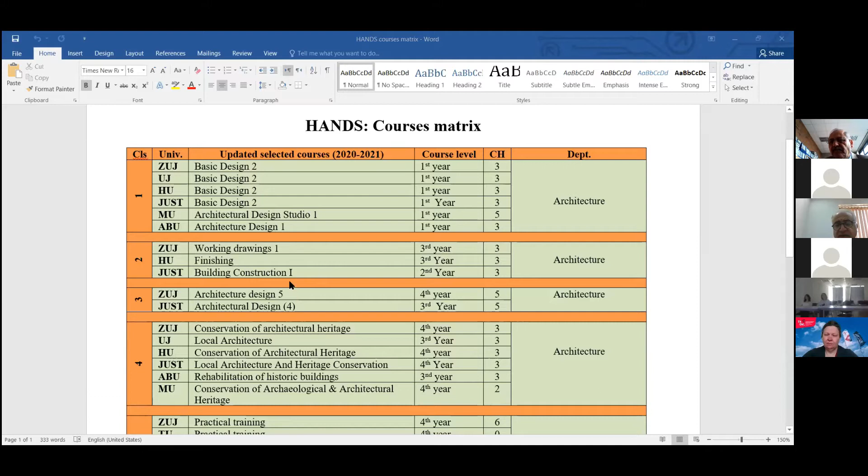We have courses in the 3rd and 4th year, which are also design courses. We have courses to do with the conservation of architectural heritage, because part of the objective of the project is to conserve these traditional processes that exist within these craftsmen and transfer them into the academia as a design and production process.

That's why the relationship between us and the craft society works both ways: we will teach them and try to develop the traditional designs and contemporary designs that have a market within Jordan, Syria, and the region. And they will give our students the knowledge of competencies needed in terms of craft design, object design, and industrial design that is needed by the labor market. So it's a mutual relationship between us and them.

By that, we chose lots of courses involved in conservation of architectural heritage, preserving the architectural heritage, and rehabilitation of these items as part of the project.

Also, all our students have to do practical training. We took the course of practical training at least 2 or 3 weeks, which sometimes extends to 3 months. This practical training will be developed within the 2 centers that are going to be established as part of the project.

One center will be in Zaytun University for the Jordanian universities, and the other one, Tishrin University, for the Syrian universities. But the training courses and programs and vocational courses will be designed by the craft society. Some of the implementation will be within these centers, and other training will be within the workshops of our stakeholders, the craftsmen.

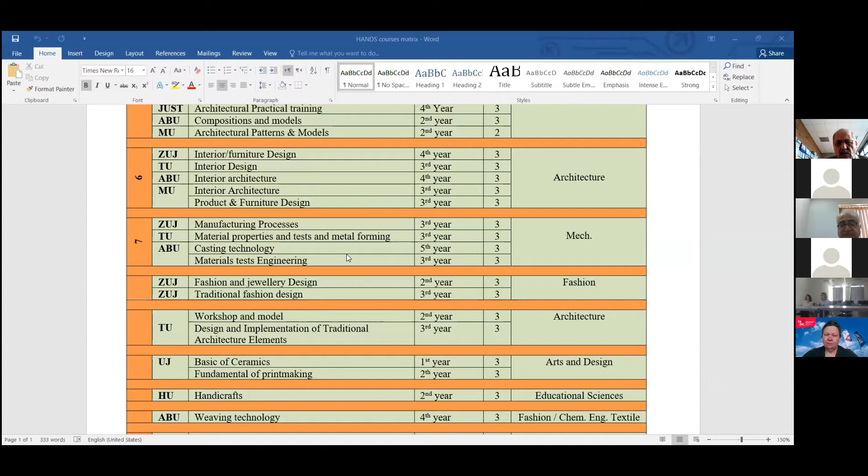We also have courses related to modeling, workshop modeling, and architectural elements, applying arts into ceramics, pottery, and different handicraft aspects like weaving and fashion design departments. Based on this project, Zaytuna University of Jordan established a fashion design department as one of the outcomes of this project. It started last year, has now run for one full year, and will continue for a second year hopefully by next September.

So this is, in brief, the courses involved in the project, a huge spectrum of courses and departments. We think this mixture of different departments and courses will enrich the project and enrich the dissemination of its outcomes in direct partnership with the different stakeholders representing different aspects of the project.

So mainly this is what I wanted to say as an introduction about the HANDS project and the courses involved, and the main goal of the project in terms of preserving the traditional craft process, supported by bringing it and housing it within academia, and also getting students involved in different design opportunities and prospects, understanding the traditional design process and developing it into the contemporary design process, which will help the craft society in marketing their products.

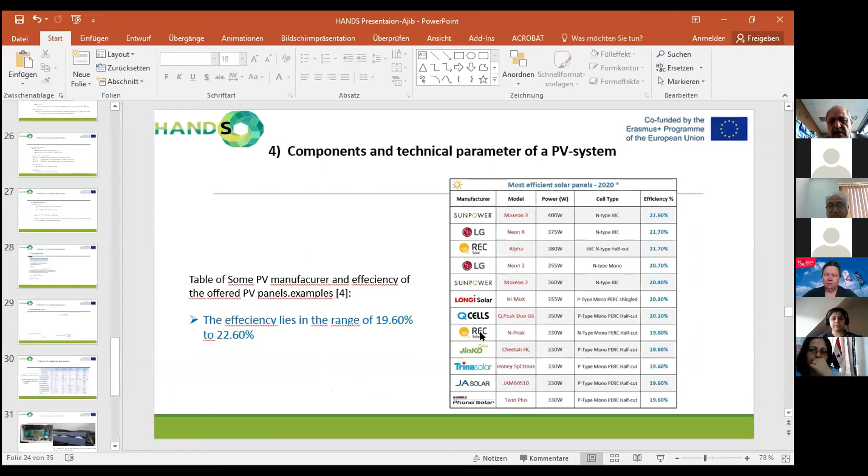Yeah, you can share screen, Doctor. Yes. Here, can you see it? So, can you see it now? Yeah, yes, we can see it now. Yes, thank you very much.

I welcome you again to my lecture. My lecture is about the possibilities of using solar energy in the framework of the project.

How can we use solar energy to make the production of handicrafts more productive, more effective, and more environmentally friendly? I thought about this lecture to show the possibilities of using solar energy, and maybe we can offer this topic as a course at the end, in the framework of the project.

So the outlook of my lecture: I will make a short introduction about the importance of using solar energy as a clean energy source.

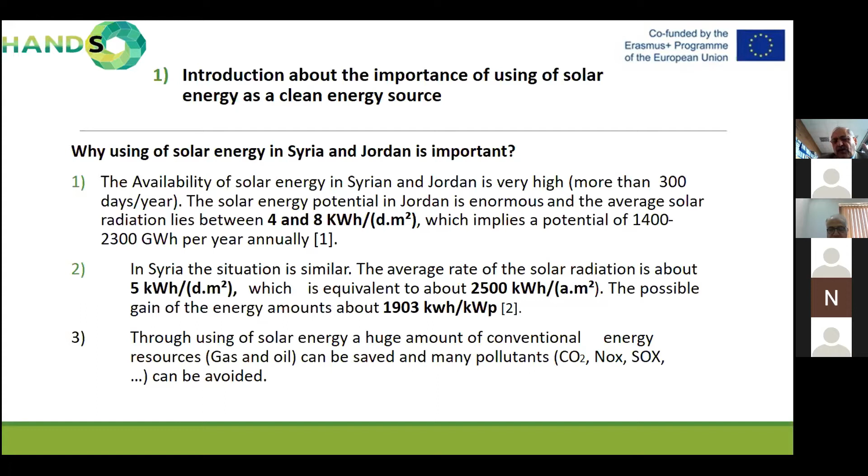And through using solar energy or other renewable energy like wind energy, we can avoid such pollutants, and we can contribute to a healthy life in the country.

That means it is enough only from solar energy to supply Jordan, Syria, and maybe Lebanon with electrical energy. That is 50 gigawatt only from solar energy, photovoltaic, and that is a huge amount. This possibility can be applied in our countries, in Syria, Jordan, Lebanon, and where sunshine is available. And it is available in most regions.

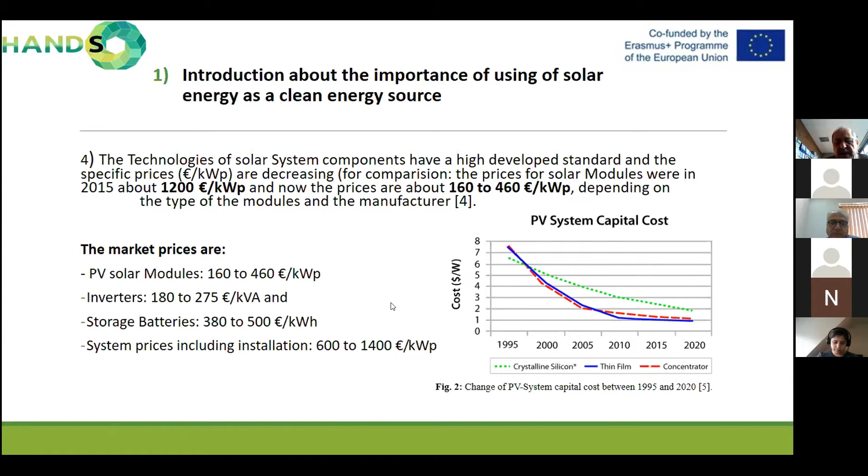So now, which possibilities do we have to use solar energy? As you know, solar energy can be used either as solar thermal energy. That means we have solar collectors, and these solar collectors can provide thermal energy, which can be used either for heating and hot water systems, or for driving solar thermal cooling systems, like absorption or desiccant cooling, which is actually our specialty, the field of solar cooling.

Or we can also use the thermal energy to drive power plants. Solar thermal power plants are very well known. We have solar concentrators, and we can produce very high temperatures, which can also produce electrical energy, and this electrical energy can be brought to the end user of electrical energy.

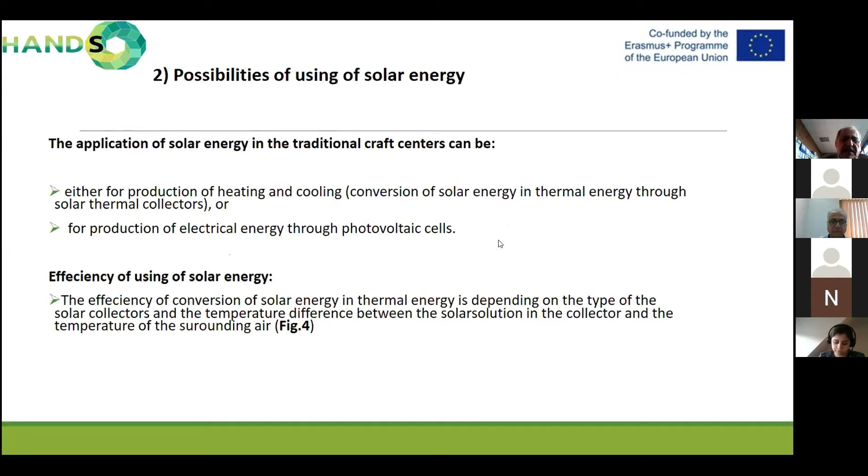A very important factor when using solar energy is the efficiency of the solar collectors.

The efficiency of producing solar thermal energy depends on the technology of the collectors used, whether they are flat plate collectors, vacuum collectors, or concentrating collectors.

Another very important factor is the temperature difference between the surface of the collector—or rather the temperature of the thermal solution in the absorber—and the surrounding air temperature.

The higher this temperature difference is, the lower the efficiency of the collector.

For swimming pools, as an example, we have the highest efficiency because the temperature difference is very low, which means the losses of the collector are very low.

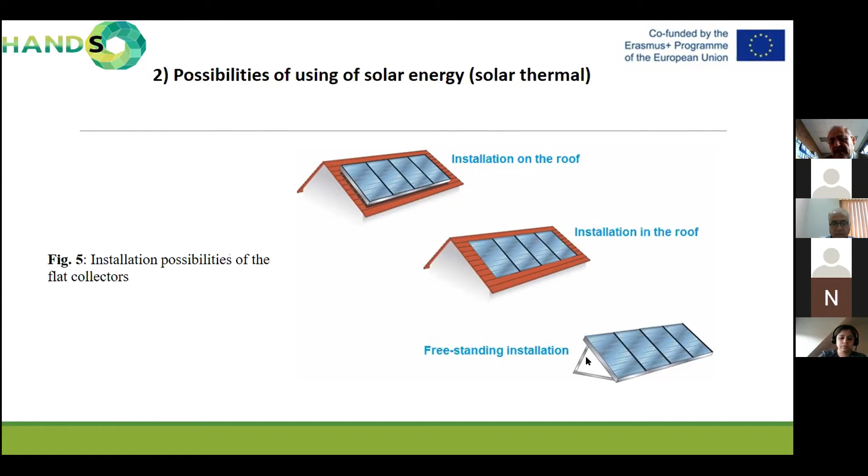In our regions, Syria and Jordan, the most common installation is free-standing, because most ceilings are flat and we have to make this kind of installation.

I wanted to show you the possibilities of using solar thermal collectors.

That is the most possible, simplest installation of a solar collector system.

The fluid inside the collector heats up due to solar irradiation and becomes lighter, so it flows towards the tank. This is a free flow collector, a natural circulation system.

The second system, which is somewhat more expensive, is the forced circulation system. In this case, we need a pump and regulation for the system.

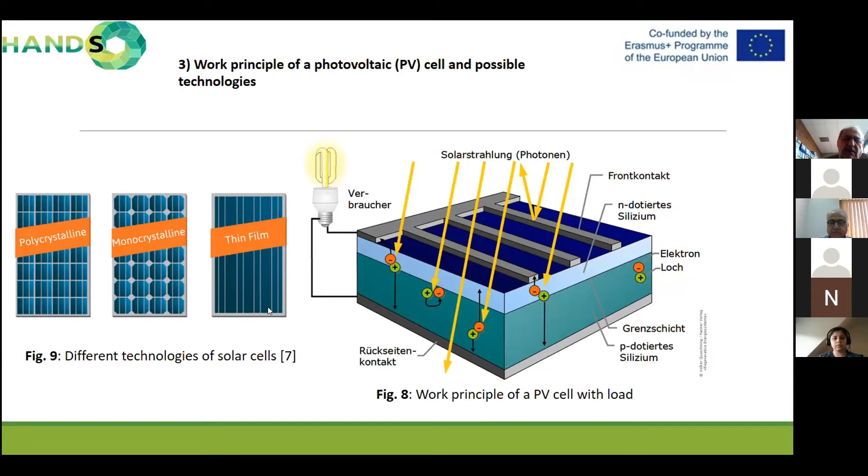So here again, efficiency of PV cells.

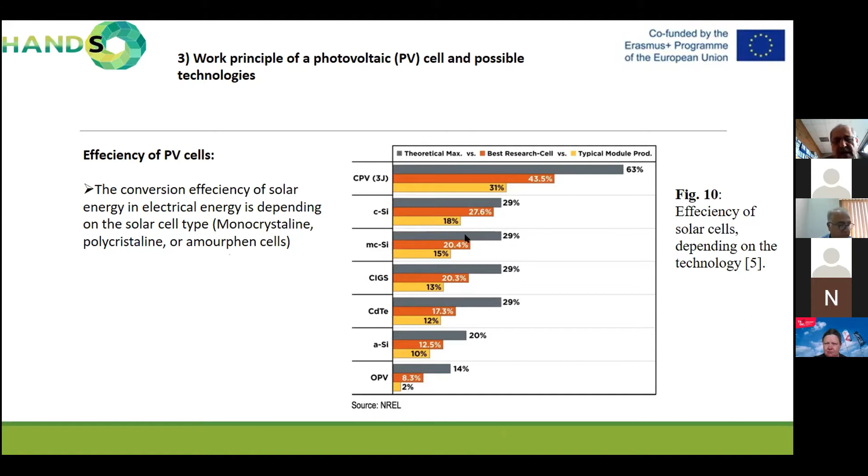That's for organic photovoltaic. Organic photovoltaic is also a field with many research works being done, because the application is very wide. The best practical ones, as I said, are the mono or polycrystalline photovoltaic cells.

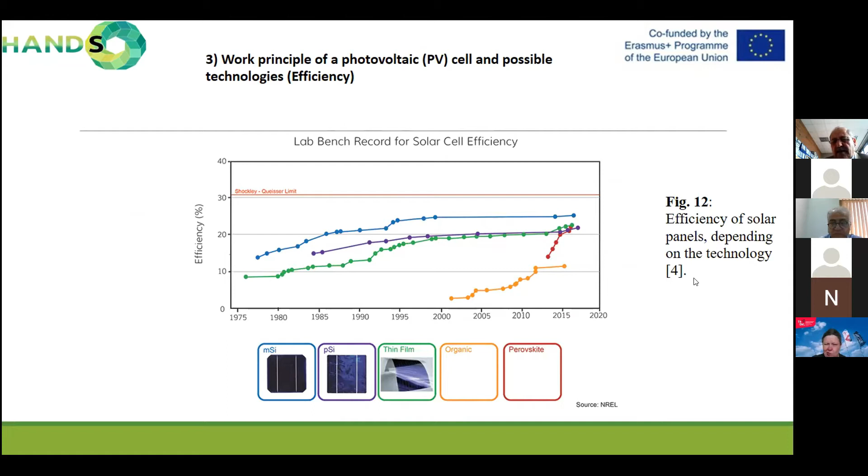Again, that's the panels according to photovoltaic type and technology, and you see in all references they show a maximum of about 24% in the best case, practically speaking.

Yes, there are many ongoing research projects in this field.

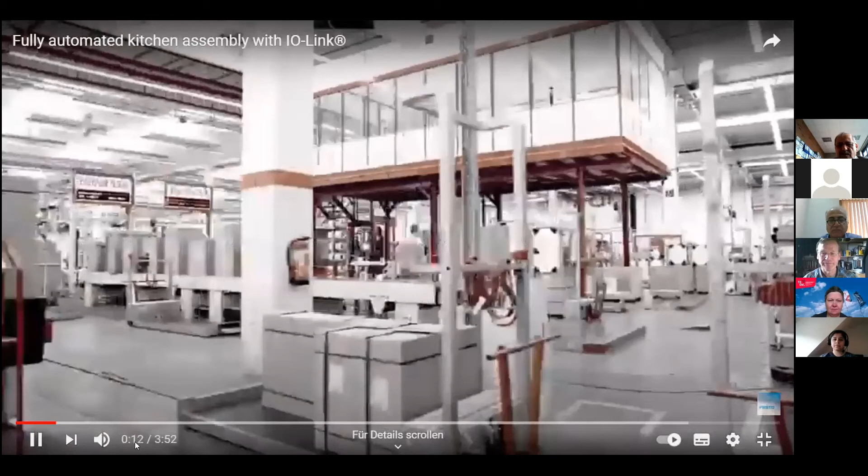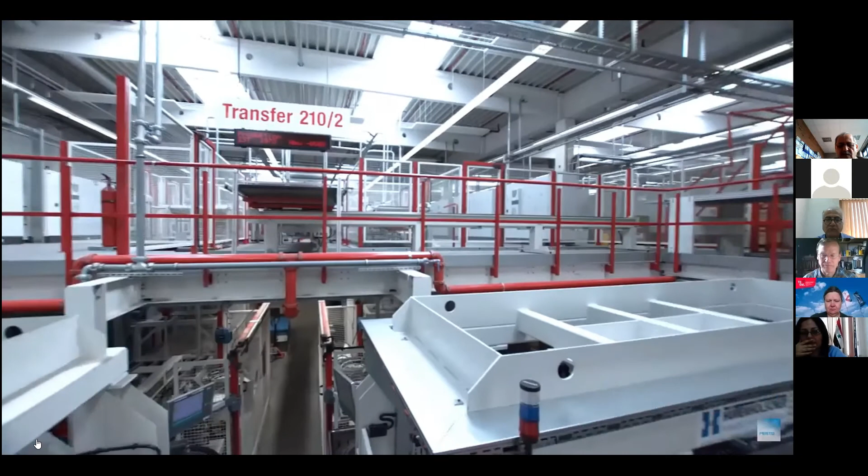A small video just to explain what we are doing, because that is Nobilia, the biggest kitchen producer in the world at the moment, and that is more or less the aim of our course of study. So you will see nothing to do with crafts. At the moment a battle is running between the big kitchen producers, and you will experience some numbers in the small video. Nobilia is Europe's largest kitchen manufacturer and the market leader in Germany. Over 3,000 kitchens leave the company every day. The secret to Nobilia's success is our 3 pillars. The first of these is the product and the quality. The second pillar is delivery date reliability, our score is 99.8%. The third pillar, which is also important for us, is cost leadership. This means we can offer our high quality products on the market at relatively low prices. High quality, delivery date reliability, cost leadership. To achieve this, Nobilia counts on reliable and long-standing automation partners. They guarantee maximum system availability. We place very high demands on our machine suppliers. That's because we expect high process reliability from the systems.

So just to give you an idea, what is the purpose of our course of study? They have to do with chipboard and solid wood and so on, but I hope they also get a good knowledge from us in mechanical engineering, how to use this machine, how to design this machine and so on. So this is in the kitchen industry in Germany state of the art, and that has more to do, I think, with automotive industry than the traditional craft of a cabinet maker. So this is the aim, but the students, due to the case that they are craftsmen, they like to work with hands, and so from time to time we present projects we do together in crafts.

The idea of the Vela Cup is from Italy. It's an international student competition, and a fast dinghy has to be designed, and it's a box rule. And what is important for us is...

75% renewable resources. In our case, it should be made out of wood because our students are more or less wood engineers. There are at the end different competitions, a towing tank, a polar diagram, and at the end then the final regatta with students as well as a professor and a student together as a group.

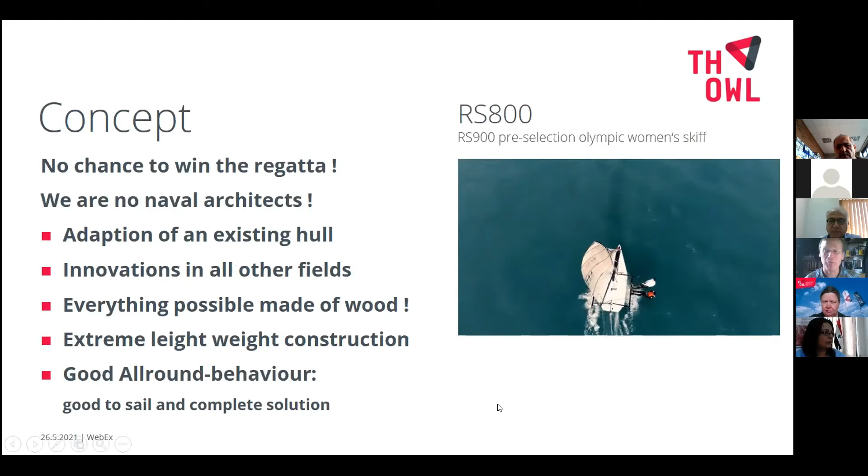So this is a plastic boat, run by 2 athletes. The idea was that we took an existing hull. We are not naval architects, so airflow design, hydrodynamics and so on - that's not a matter of wood engineering.

So the case was that the innovation should be on other fields, and the slogan was 'make everything possible out of wood,' and we succeeded at the end. So that means it was an extreme lightweight construction with good all-round behavior, because our athletes are not the normal ones.

So we were quite inventive, because what we see here is the state of the art of sailing at the moment, the America's Cup. Just some months ago it was finished and won by the New Zealand team. Here you see the Italian team, and they had also a turnable mast.

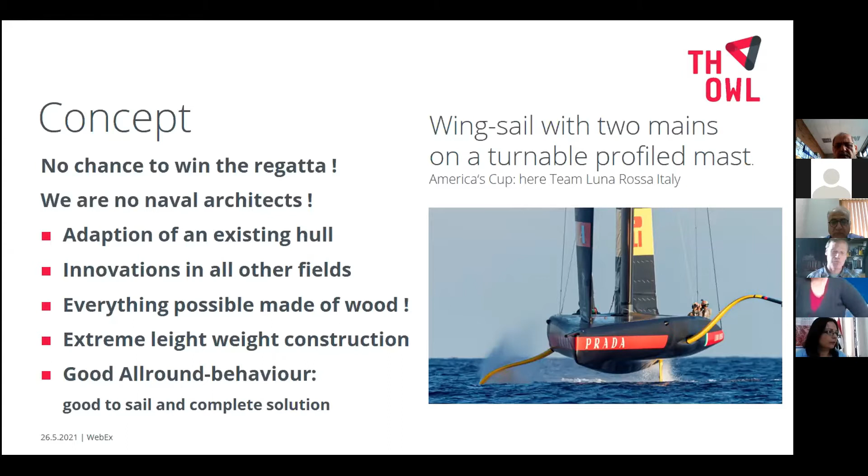Our mast was wood; this is carbon fiber, and they have a double mainsail - if you are a sailor, maybe you can find it out. So the innovative level was quite high in our small project at the end, and also the craftsmanship, as you will see.

Though the design was not made by our own, so we took a boat - I have such a boat as my own - and 2 students were in my garage on a very cold day in winter and took the measurements of the hull.

Then at the end, we had a point cloud in Inventor, made a 3D model, then reduced it again to 2-dimensional drafts in AutoCAD, because that is what we have traditionally at our hands, and the students are able to design in AutoCAD. This was then the basis for further developments, especially in the courses and classes which were involved, and they got some ECTS points.

So engineering work was done in most cases in the classes.

We then developed some sort of incentives. It was planned to do it more often, but at the end it only happened for 1 week in 2019. The rest was then skipped and postponed due to Corona.

That was to push the motivation for the students to do the work, because all the craftsman work was done voluntarily. So sailing is a good push for motivation. It was then accompanied by general physical exercises. At the end, it was a casting for the sailing crew to find out who might be best for the sailing crew.

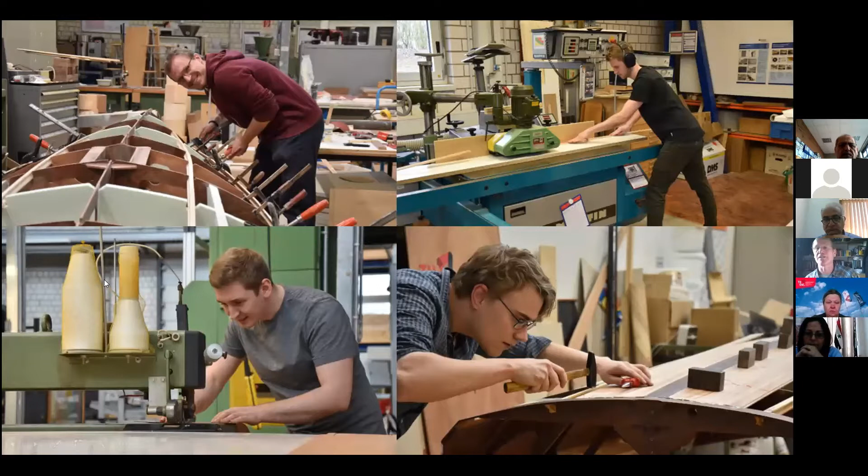So here vacuum pressing in lamination. Here again you see the hull existing, a molder, a sewing machine for veneers, and then strip plank activities, handmade for these machines with the students who were involved. Then steaming and bending, and gluing, and also sewing and welding. This carriage was welded by our apprentice in cabinet making, a female apprentice for a cabinet maker in our shop floor.

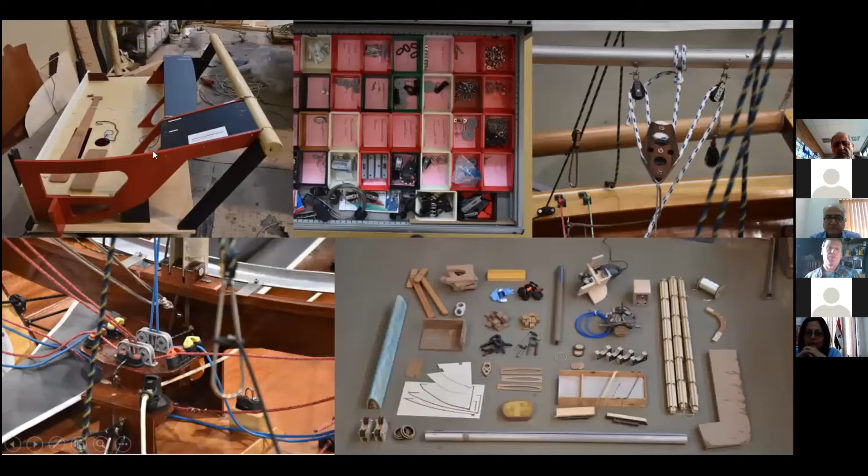We used a box, a model to find out the ergonomics, and that was quite often used by the students, along with fixtures, blocks, and clamps and so on. If possible, the students used our FDM or selective laser melting machine to print it out at the end.

A lot of fixtures had to be used. You see later a lot of lines and clamps and so on. These are fixtures we developed here to get the job done. Mast building was quite challenging for us, more than 8 meters long, very accurate, very thin, and turnable. That is maybe something which is important and which was a challenge.

So craftsmanship. We have different machines in our shop floor. A CNC router was used in 3D, molders, a sliding table saw, a wide belt sanding machine, water jet, and laser cutting machines were used, and different power tools. And craftsmanship, so formulating two-component adhesive and gluing. This was quite nice.

Steaming and bending - normally this is not included in our education, the professional education of our students, so this was something we had to learn as well. Sanding a 3D hull so that the hull at the end is strak, so it has a nice shape. WIG welding and sewing - we had a sewing shop floor as well in our fab lab in Lemgo, so the sewing machine and welding were used. We had to use a lot of craftsman devices to get the job done.

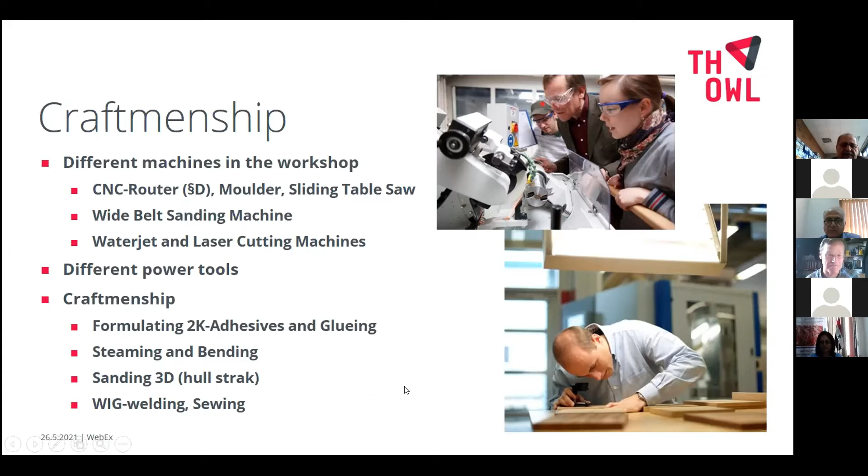Here now, this was also a challenge because that was a master thesis work. The beam of a sailing boat, where the sail is horizontally fixed, is normally made out of aluminium, and from my point of view that's the best material you can use. But our challenge was to make it out of wood. So how do we produce a perfectly round tube made out of wood?

The idea was to wrap a veneer around a kernel made out of aluminium, and you see here the direction of the veneers, which is due to optimization in context of the tensions which are inside. Let the video play so you see how it's made - we wrap it around, first diagonal layers to get the shear compensated, and then at the end wrapped around and glued together with epoxy resin.

This was a development of a manual manufacturing process, and the automotive industry is very interested in our developments because these wooden pipes could be used as a floor in buses. Normally there we have a plywood construction, and to make it more light, the automotive industry is looking for a replacement, a hollow system made out of wood, because wood is a renewable material.

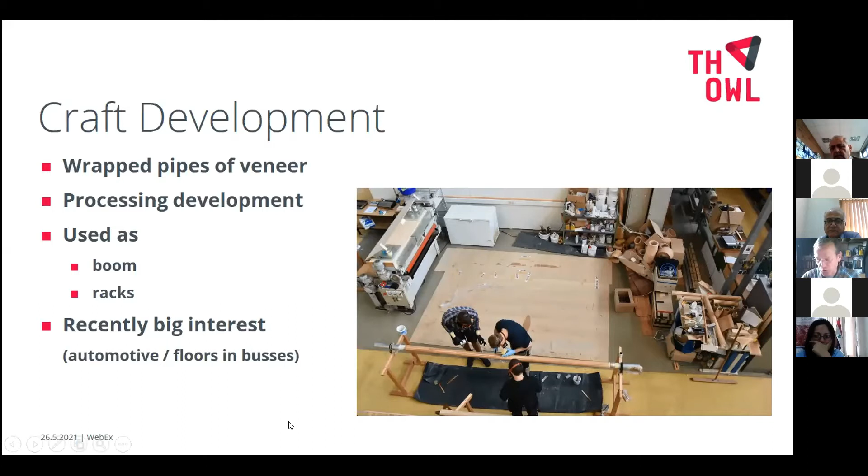Then I said, okay, that is the aim of our purpose, industrialization. The idea was how we can industrialize the processes we did by hand, because that's our educational aim, as I showed with a small video from Nobilia. So we invented a machine which uses the process we developed by hand - it's just a concept, there is no funding to produce this machine - which should be able to wrap the veneer around. The whole workshop was also planned by our student in the master course.

What you see here in the background are machines designed by our students to use a special technique with a strip plank, pressing a three-dimensional hull shape, not the complete hull but a not-so-deep shape. This was then fixed together with a press, and could later be used to produce bathtubs or other items made out of plywood strips fixed together with glue. These kinds of developments were also made in the context of building a boat for competition.

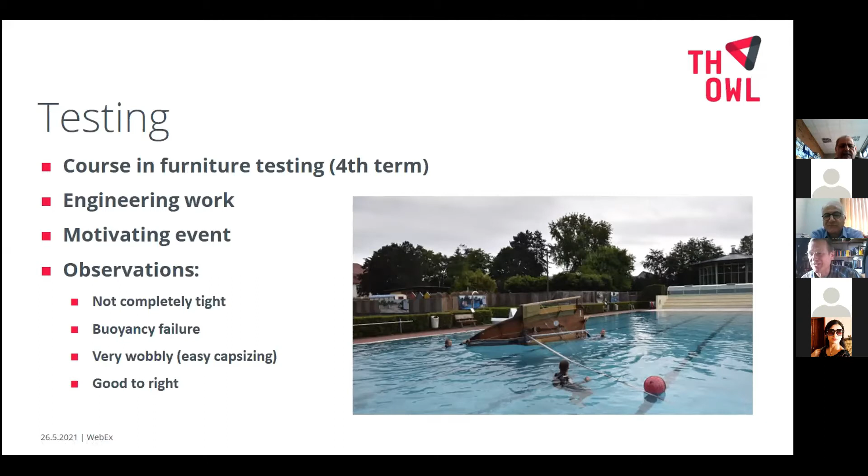Then the boat got sails, and later it was tested in a lake next to our university. It's a quite fast and very good boat, good to use. So now in numbers: 20 knots speed, that's quite high.

What are my observations in the projects? Our students are motivated if ECTS credits are given. If not, it's quite challenging to get the project running - that is a huge factor, ECTS. If they can do the work completely digital, 3D design and then print it out, that's great, that's what they like. So handwork, even if they are craftsmen, the digital work is preferred.

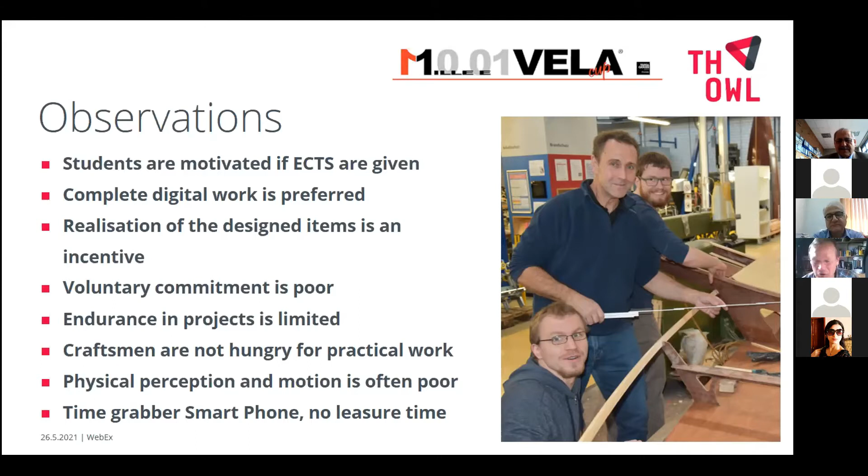What is also nice is that at the end, all the technologies we have developed could be used elsewhere. The colleagues Neta and Sachse have already had a closer look at all the things we have developed, as well as the boat, because maybe this can be used to design the cabin of the monorail, which is a big development at our university together with the University of Applied Sciences Bielefeld. They developed a monorail railway using just one rail, and there maybe they will use all these wooden technologies we have developed.

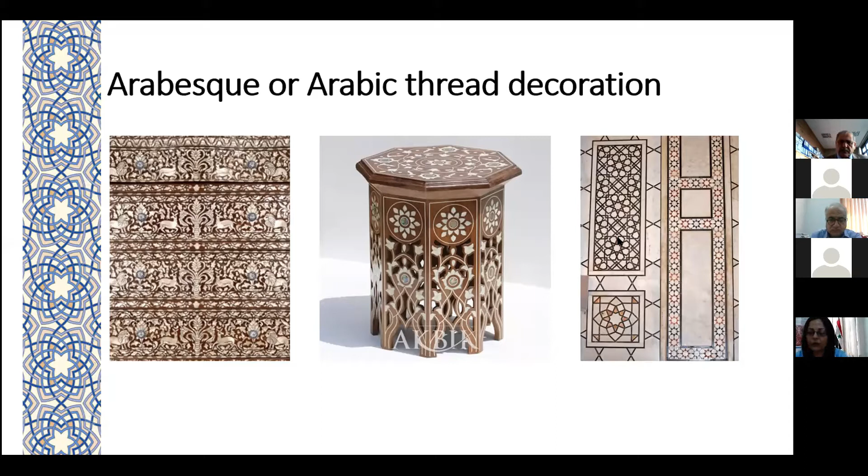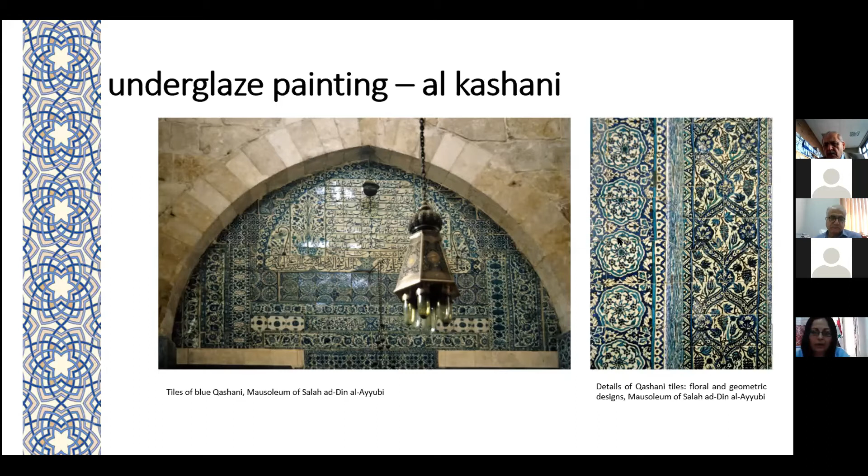Now we will talk about the relation between architecture and craft. It's very important that we try to understand what are space-making crafts and what are space-making elements. We can say that space-making elements and space-making crafts together create architecture. And when we talk about this creation, we will talk also about materials, skills, tools, technique and technology which combine to make this type of architecture, translated into building, furniture, objects and artifacts, surface finish, surface ornamentation, and hardware and accessories.

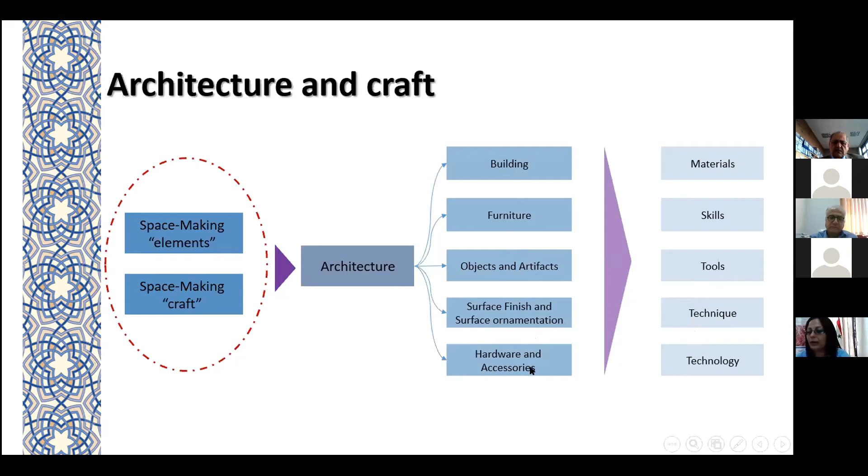So space-making elements could be referred to as architecture elements and interior architecture elements that make space. These elements could be architectural, like floor, wall, columns, roof, etc. And it could be interior, like doors, windows, furniture, ornamental surface finishing, colors, and etc.

What we define as a space-making craft are the crafts related to building, to generate and define and enhance building with materials such as wood, stone, glass, metal, clay, etc. And again, this is the classification of crafts and traditional crafts, where we can merge the materials and the crafts.

In Syria, architecture and craft trade were part of the socio-economic character of major Syrian cities, and guilds played a crucial role as a channel of representation for artisans in their societies, regulated through agreement, and therefore shaped their relationships to their states. In Damascus in the 19th century, guilds show the essential role of master builders in regulating micro-planning, working directly with residents and authority, and practicing in private or public construction.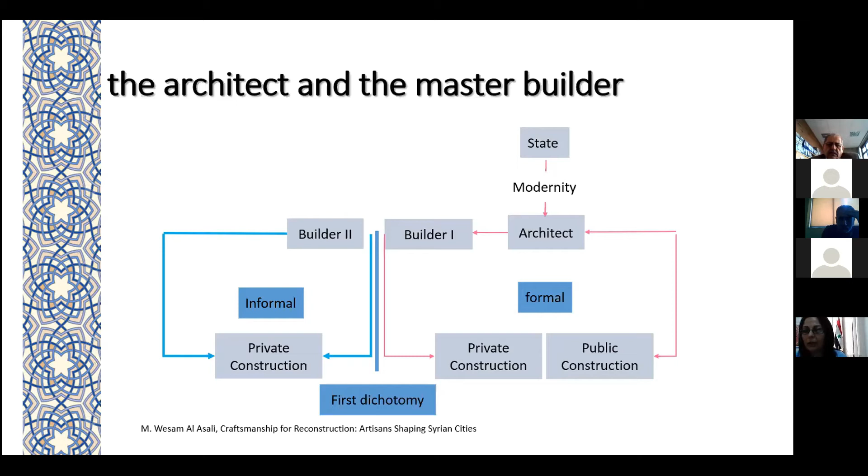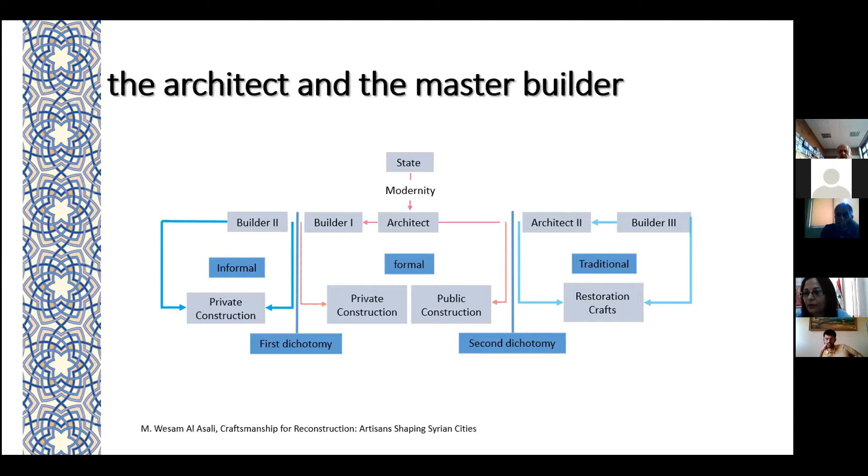The greatest understanding and appreciation of heritage in the Arab world relied on the term authenticity. This understanding varied from rigid conservation in a few Arab countries like Syria to a total liberty to demolish and reconstruct historic buildings or sites like in Gulf countries.

The term authenticity was introduced in matters of heritage, art, and architecture. So we present heritage architecture as authenticity, and it was a very important term for the architects in that period to make their own concept.

So authenticity of the buildings of this style relies, according to several Syrian reformers, on the creativity of its architects in reviving, rationalizing, and reformulating local references according to contemporary logic, spirit, and techniques.

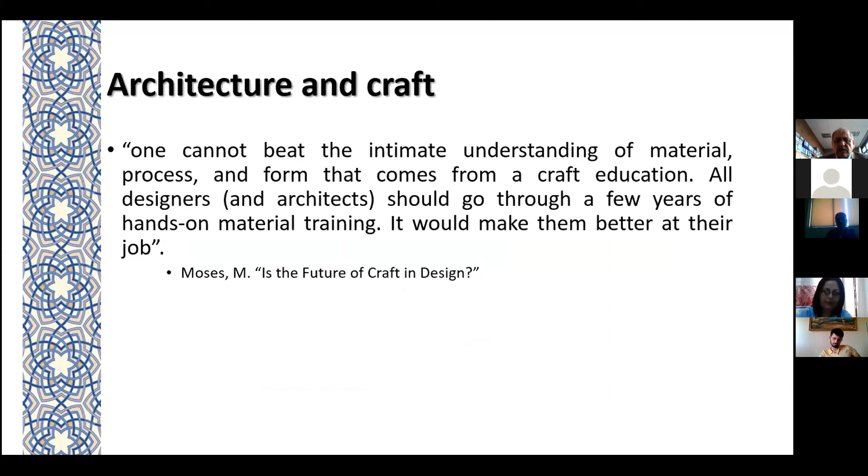We have to recognize this sector, in our work and in our education, pedagogy, and architecture practices, through research, documentation, mapping, craft workshops, innovation studios, training, research, application, and resource building.

So our aim in our course about design and implementation of traditional architectural elements is to achieve three important things. First, incorporate knowledge of contemporary and historical art and design theory principles and historical practice in the conceptualization and development of studio work. Second, train students to research the architectural elements that characterize local architecture and fit the social environment. Third, redesign and implement these heritage architecture elements in accordance with the requirements of modern architecture.

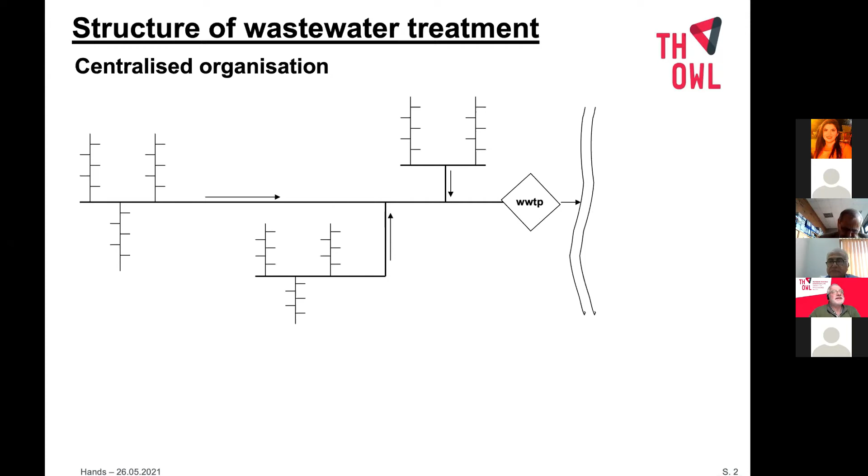In Europe as well as in Syria and Jordan, we have more or less rural areas where we have to look for decentralized organization. This can mean quarters or areas connected to wastewater treatment plants, or it can be downsized to property solutions where you have a wastewater treatment plant for a house or group of houses. There's a strong discussion about whether centralized or decentralized organization is recommended, but it depends on the boundary conditions and local conditions you find. The structure has to be chosen depending on the local conditions.

So you have to decide whether it's better to do this on a central or decentralized level. Wastewater treatment is still a common problem in Europe, and we are also looking in rural areas for appropriate technologies. For this, I will show you constructed wetlands.

What is a constructed wetland? A constructed wetland is a filter bed, mainly with sand or gravel, with plants. This filter bed is loaded with wastewater, and during this procedure, after the loading, the wastewater is treated and can be discharged or used for different purposes, like irrigation. I will give you a few slides later on about the construction of constructed wetlands.

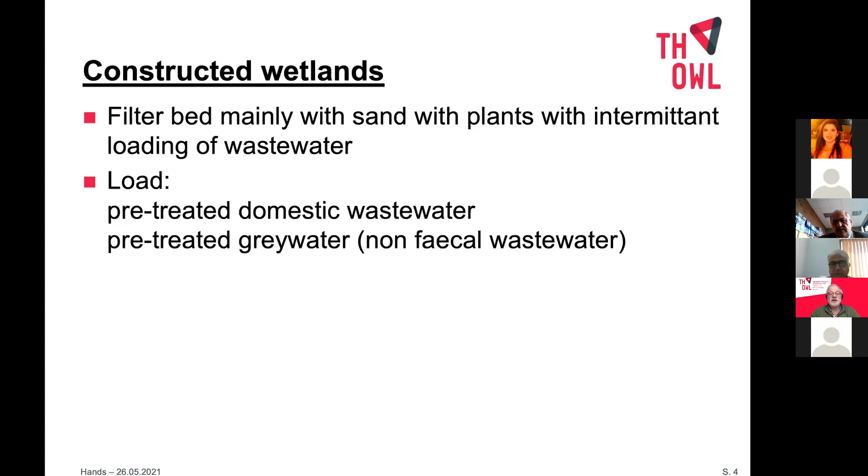We have a filter process, and filtering is very sensitive towards particles which carry the risk of clogging the filter, therefore a pre-treatment is necessary. The pre-treatment and constructed wetland can be used for domestic wastewater, the whole wastewater, or it can also be used for treatment of gray water. Gray water in this sense is wastewater without any fecal wastewater, meaning toilets and toilet systems are excluded. Both are possible, depending on the size of the unit and the pre-treatment.

The application of constructed wetlands is not so common in densely populated areas, but you can find them in Europe or also in Jordan, for example, in rural areas, because people can partly do the construction work themselves. So it's also cost saving, and therefore very interesting for application there.

At first, we need a pre-treatment. The pre-treatment for wastewater is more commonly a sedimentation tank, often named a septic tank. This means the solids can settle down, and it works as a trap for the solids. The volume for such a solid trap in the form of a sedimentation tank is very important, and it depends on approximately 600 liters per person up to 2 cubic meters per person, because we have to collect the sludge.

The sludge volume we are collecting, as a rule of thumb for domestic wastewater, is approximately 500 liters per person per year. For gray water, it's more or less only 10% of that, because when the gray water does not contain fecal matter, the solid content is much lower, so we have less sludge. You have to keep this in mind. This sludge volume rules the size of the septic tank volume, so when you have a gray water treatment plant, you can make it much smaller than when you treat domestic wastewater as a whole flow. But I will not focus on the pre-treatment; I will focus more on the constructed wetland.

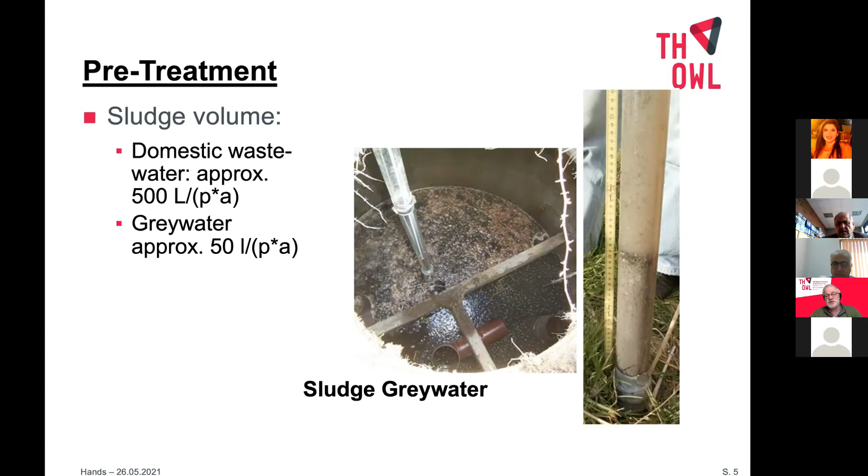When you have a constructed wetland, you have to look for a proper pre-treatment which works properly to avoid clogging of the filter bed. The sludge is an example - from gray water, sediment collects on the bottom of the tank and afterwards can be pumped away by a sucker. For gray water you have to do this every second or third year. For domestic wastewater, where there's a bit more, it's recommended to do this every year.

So we have different types of constructed wetlands. We can differentiate them as free water constructed wetlands, or horizontal flow subsurface constructed wetlands, where the water has a more or less horizontal flow direction. This is very easy to construct, you don't need a pump, and it can be done at low cost. But the effectivity, meaning the elimination rates, of horizontal flow subsurface constructed wetlands is much lower than for vertical flow subsurface constructed wetlands.

Therefore vertical flow systems now dominate the situation. When you have constructed wetlands, you mostly find vertical flow subsurface constructed wetlands, and with them you have very good treatment at low costs, and in many countries we have good experience with this type of constructed wetland.

So what are the characteristics of constructed wetlands? First, we have plants on the constructed wetland, and the plants are not really responsible for the cleaning effort. They only do a part, because the main biological treatment is done by the biofilm on the filter bed, but the plants support this process, and they also give a nicer view - it looks better planted than without. We will see this later on the slides.

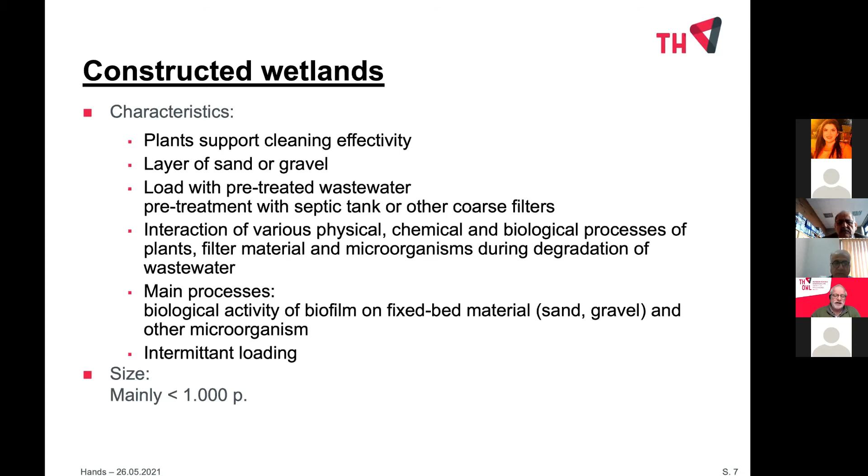This filter layer is planted with plants, and we often use reed, but you can also use pampas grass or other plants - that's not so important. You must be aware that the plants need to be able to live with this fluctuating water level.

Then we have a distribution pipe system - mainly small pipes with holes on the bottom. The water is pumped into this pipe system using intermittent loading, meaning it's not done constantly but flush by flush, and the water rinses through the filter bed. It's not even necessary to have a pump when you have a sufficient slope - you can do it by gravity, but then you need a difference in height, which isn't the case everywhere. Therefore we often work with small electrical pumps.

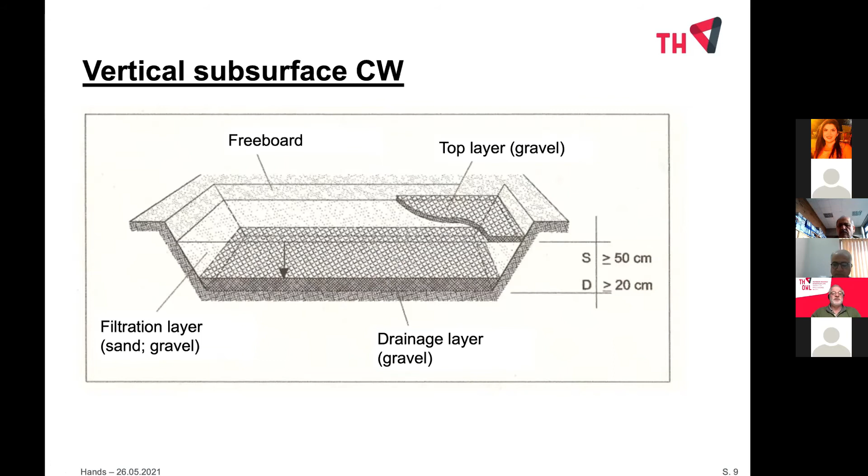So what are the design criteria? You need approximately 4 square meters per person, a number given for European conditions. In other countries where it's much warmer, you can go down to 3 square meters per person. And when you load this only with gray water, you can also reduce it down to 2 square meters per person. So this is the space you need.

In our German regulation, and also from experience, you need at least a minimum surface of 16 square meters. That's the smallest surface, but you increase it with the increasing number of the population. The COD load, a value for the organic matter in the wastewater, the chemical oxygen demand, should be around 20 grams per square meter per day, and the hydraulic load should be 80 liters per square meter per day. Because when you exceed this, there is a risk of clogging, and the retention time of the wastewater in the filter bed is too short, so the effectivity drops down significantly.

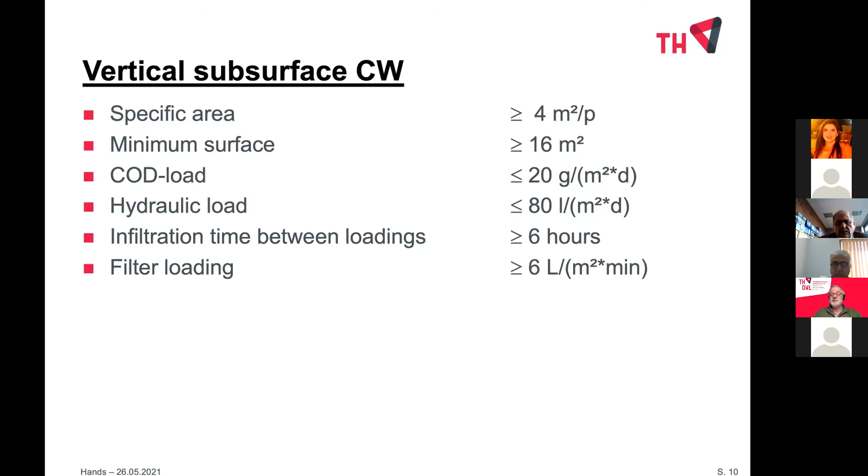As I said before, we have intermittent loading. That means the infiltration time, the time between the two loadings, should be at least 6 hours, meaning on average 4 loadings per day. The filter loading during the pumping operation should be 6 liters per square meter per minute, so that we have a proper flush on the surface of the pipe. Approximately 6 liters per square meter should be loaded per flush.

The outflow orifices of the distribution pipe should be at a minimum 8 millimeters in diameter, because when we have raw wastewater or raw gray water, we also have biofilms. When you make a very small opening in the distribution pipe, there is a risk of clogging, meaning biofilm growth takes place and closes it. Therefore, it's recommended to have an outlet of a minimum of 8 millimeters.

And the area per outflow orifice should be at least 5 square meters. When you make more of these openings, you can reduce the area per person, because the distribution of the water is much better, so we can reduce it.

So the sealing of the filter bed can be done by a mineral sealing, for example by a layer of clay, so that you don't pollute the groundwater. The permeability should be lower than 10 to the power of minus 8 meters per second, and the mineral sealing should be at least 30 centimeters thick. This is recommended when you have clay in the area, when you can have access to it, when it's cheap, then you can use this.

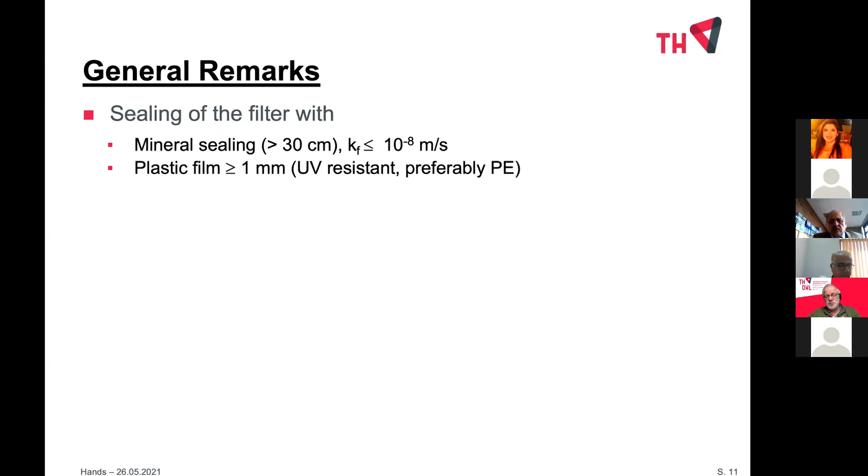Otherwise, you can use plastic films, which should be UV resistant, mainly made of polyethylene, with a thickness of at least 1 millimeter, which should be welded to avoid any leakages into the ground.

For the filter material, we propose, or we have good experience with, a one-layer filter. That means a uniform layer diameter, and the permeability of the filter layer is given as a technical number. It should be sandy or gravelly, and the sand diameter should be 0 to 4 millimeters, with a characteristic that 10% of the coarse diameter should be between 0.2 and 0.4 millimeters, and the degree of irregularity, D60 to D10, should be lower than 5.

It's characteristic how deep or how steep the sieve line is. The filter layer should be at least 50 centimeters, because the most active filter part is the upper part of the filter layer. Here we have most of the biofilm, and the most elimination rate is in the first 15 to 20 centimeters, and the rest is working as a reserve, a reservoir, for example when we have shock loadings or higher loadings.

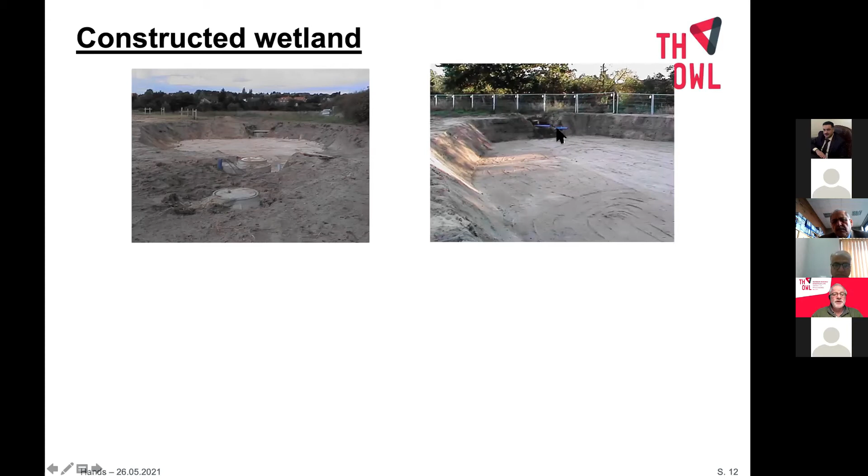Then after the final excavation, you could see here the construction site with the effluent pipe, which are still there. After installation of the plastic sealing, you can see the layer of the black plastic liner, and then the drainage pipes on the bottom of this filter bed. Here the collection pipe as well with the outlet, and then it is filled with the gravel layer here.

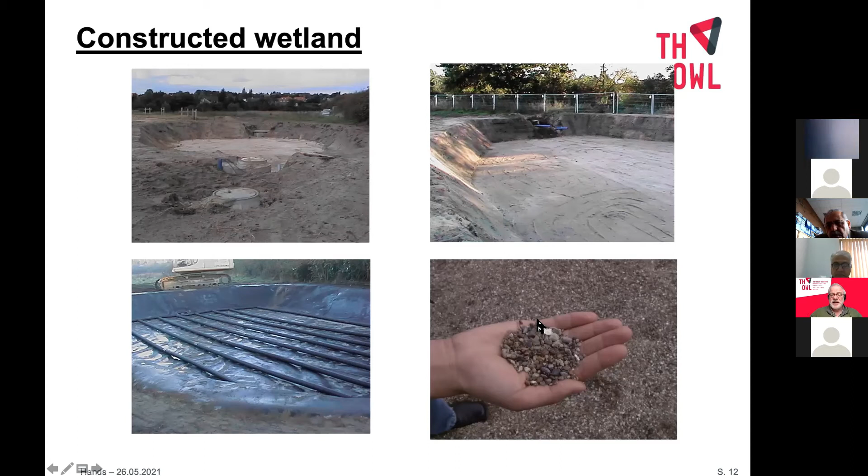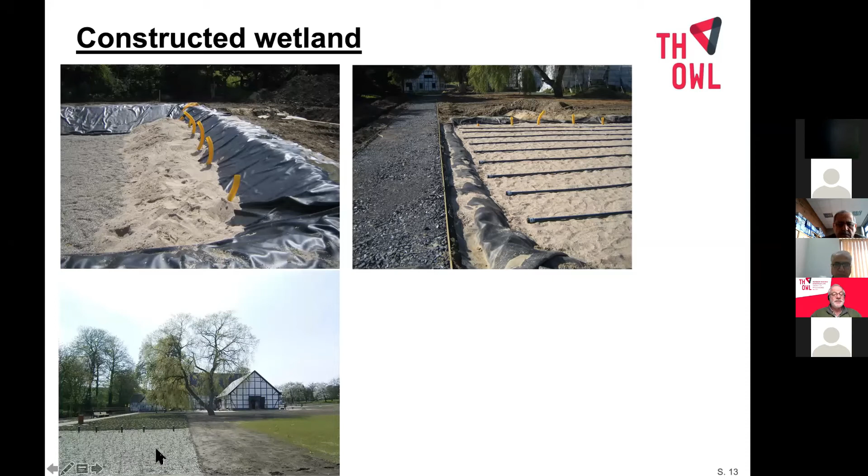After the finalization of the work, here you can see the small plants, which are just at the beginning of operation. You can see the outlet pipes, the aeration pipes. And then after a few months of operation, you can see the reed is really growing well, with good water supply and good supply of nutrients, and you can see it's operating quite well.

Here you can see that they don't build any fence around it, because you have no open water surface - the distribution pipe is in the top layer with the gravel. So you don't have access to the wastewater directly, and it's also covered by the reed, so you can be safe that there's no risk of people getting infected.

The question very often is, what about the odor? Is there any odor? Is there any complaints about odors? We have many experiences where the constructed wetlands are really just near the houses, and you don't ever hear any complaints as long as the maintenance is done.

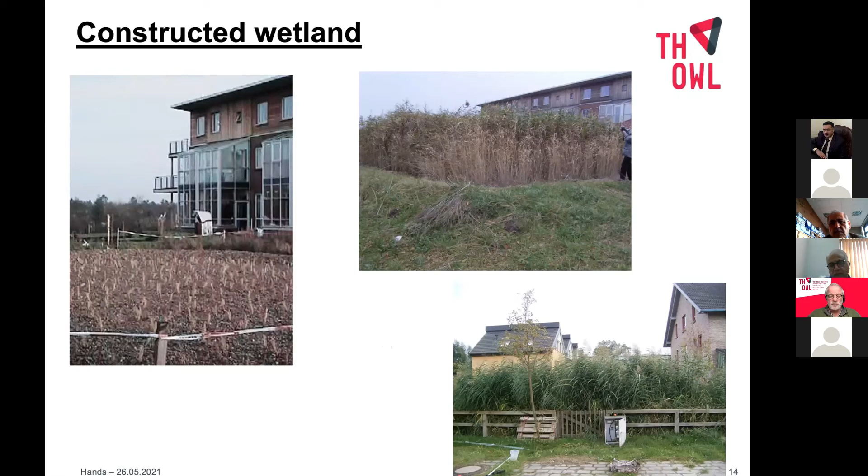So you have to do regular maintenance. That means you have to check that you don't have any surface water on top of the constructed wetland, that the effluent is working properly, and that the pump is also working.

And the effluent quality - when you start here, this is the influent water, the treatment in the constructed wetland, and the effluent quality is quite good. You can use this for irrigation purposes, or for discharge into water bodies without any problems.

When we look now at the treatment efficiency, I have here an example from Europe, from grey water treatment plants. You can see here the COD and the BOD load. The BOD is the blue line in the effluent, the COD is the red line in the effluent, and we have here an operation time of approximately 13 years, a very long time - starting from 2006 up to 2019.

At the beginning, the COD values are a little bit higher, and after a few years, it's really very, very low, a very low discharge. Of course in this case it's grey water, but you have similar values also for domestic wastewater. It depends a little bit on the load you have in your catchment area.

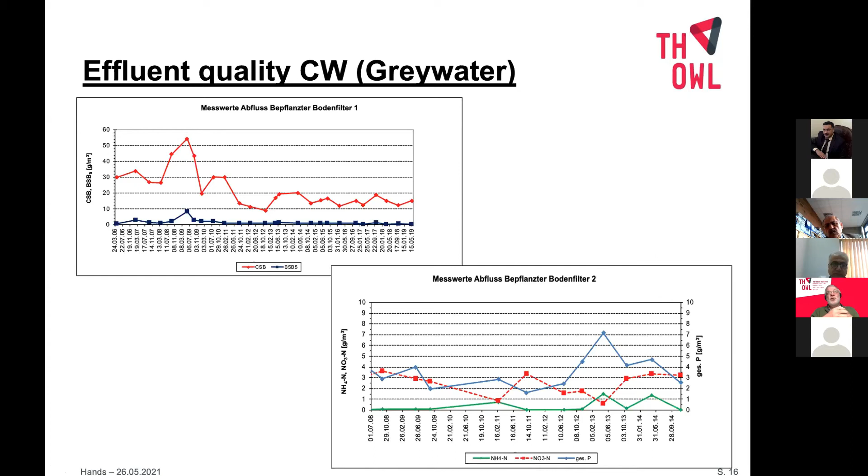We also have quite good nitrogen removal. What's not working very well is the phosphorus removal, because phosphorus needs partners for the precipitation process. With this, phosphorus is very difficult to remove with constructed wetlands. Therefore, they are mainly applied when we have removal of organic load, which is more or less the main topic in rural areas.

This is also done in Jordan. You have the first experience, as far as I know, of experiments done with constructed wetlands here in Jordan as well, in rural areas. We have a cesspit for the toilet wastewater, and the grey water goes to a sedimentation tank, and then is distributed and loaded to a two-stage constructed wetland.

And the removal rates are quite good. You can achieve removal rates of organic matter in form of BOD of approximately 80 to 90%, and the same also for the COD all over the year, and also across many different plants. These are results from 4 plants which have been investigated in a rural area in Jordan.

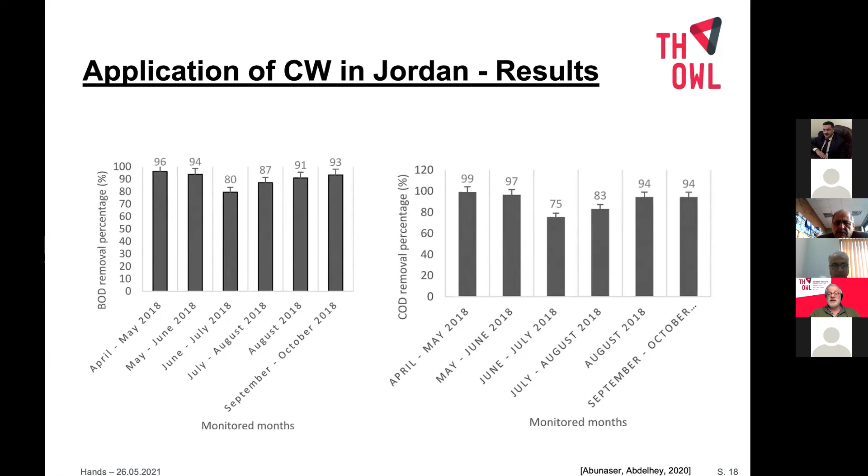For details, you can look at the literature which I gave here at the end of my presentation. So as a summary, we can say that constructed wetlands are easy in construction and operation when you follow very simple rules and train your people well. Constructed wetlands are an appropriate technology in rural areas, especially in countries with water scarcity, because the effluent quality of the water is quite good for irrigation, since nitrogen and phosphorus can work as a plant fertilizer.

It's also feasible to do under Jordan conditions. There were investigations about the year of return on investment, and they show that it can work economically under these conditions as well. So, I would say thank you for your attention, and feel free, don't hesitate to ask questions.

Yes, Simon? I have a question, please. Sorry, yes. Thank you, Martin, for the interesting presentation. My question: how often must the maintenance of such a system be done?

And if some tubes get defective, what can we do? So the main question is the pre-treatment. When the pre-treatment is designed properly, you can operate these units for years. Like you can see, the longest experience we have with constructed wetlands is up to 13 years.

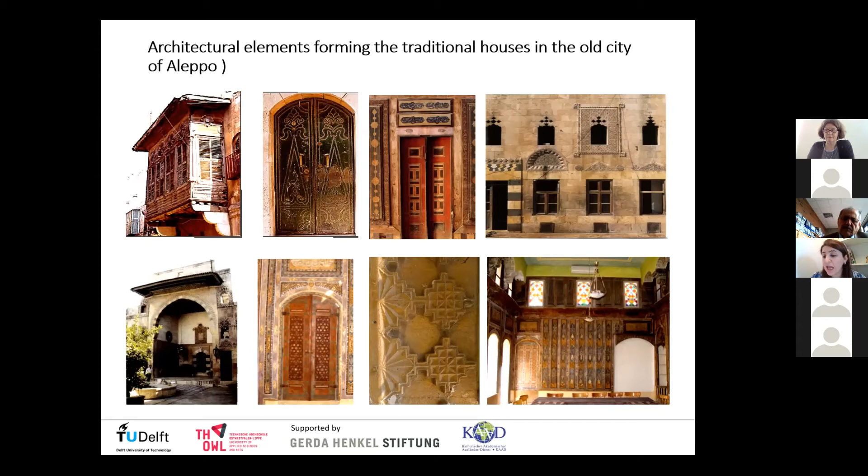Aleppian limestone, available in Aleppo, was regarded as the best stone for carving because of its long-lasting hardness, which is gained over time. This Aleppian artistry culminated in the 12th century with the invention and use of al-muqarnasat.

Unfortunately, in the summer of 2012, the Syrian civil war escalated in Aleppo. This made it one of the most heavily damaged cities in Syria, with about 30% of its buildings completely destroyed and a huge amount of debris generated, resulting in the city being placed on the list of World Heritage in Danger in 2013. In addition, most of the inhabitants of the old city were forced to leave their houses and relocate somewhere else in or outside the city.

As a result, many obstacles and restrictions, such as a lack of qualified labor and also a lack of education and training facilities, are leading to more traditional heritage setback.

I want today to highlight the importance of material reuse. The reuse of debris has not really become established in Syria, except in some recently initiated pilot projects. The reuse of building elements and recycling materials are not new ideas.

From the earliest days of large-scale masonry construction in ancient Egypt, Greece, and Rome, stone has been reused many times as buildings were destroyed by earthquake or in war, or simply fell into disrepair. The manpower needed and the cost of reusing stone was much less than using new stone from distant quarries.

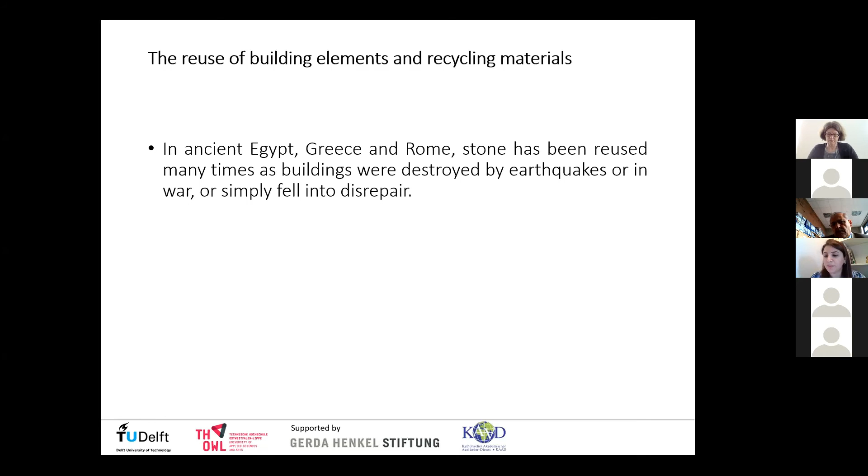Considering the massive structure of the traditional buildings in the old city of Aleppo, most of the debris accumulated in old Aleppo city will be stone, wood, metal, as well as soil, which was used as isolation and filler between walls and the roof.

In the old Aleppo city, activities to support the preservation of debris and urban historic fabric are still limited to emergency measures for the early recovery phase. In parallel with the damage assessment, debris removal is being carried out in four phases.

Most stone have been kept in place with the aim of recovering and reconstructing old buildings in the historical city center using historical material in order to preserve the city's identity and cultural heritage.

In contrast, in Aleppo, the strategy of debris preservation has already begun, though it's largely limited to one iconic historic building where a buffer zone has been imposed around it that cannot be passed by. This means building debris cannot be tampered with, and original building material can be extracted from the debris.

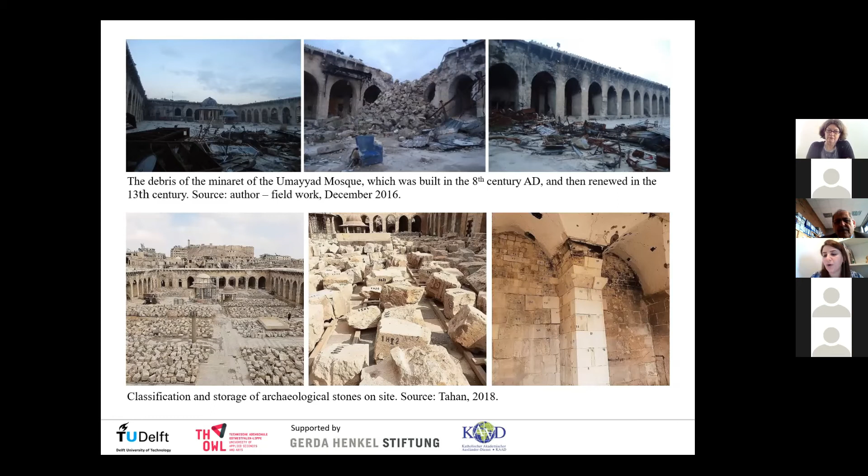Collecting salvaged material for reuse requires the material to be accumulated at specified points and separated according to type and usability. In this context, I have proposed temporary open spaces in the old city of Aleppo in order to store material until it can be

recycled and reused for old and new building and infrastructure. It will also enable treatment to be studied involving minimal intervention, retaining structural integrity, and integrating new objects and technology. I will refer to scenario 1, which is transformation of destroyed sites into

multi-purpose public spaces, including damaged waste management zones and parks, which would provide a dynamic public space that fosters socio-cultural interaction and promotes the involvement of residents in preserving the cultural heritage while meeting the need for a playground and recreational area. Scenario 2 is about transformation of components of destroyed historic buildings into new components and buildings.

The reuse of building waste doesn't require complex technology or equipment. It merely requires manual labor or simple tools. As such, reuse is the simplest and most effective way of restoring historical buildings. Moreover, the use of salvaged material in new construction not only saves money, but also protects land resources and transfers value attributes of historic buildings to the new one.

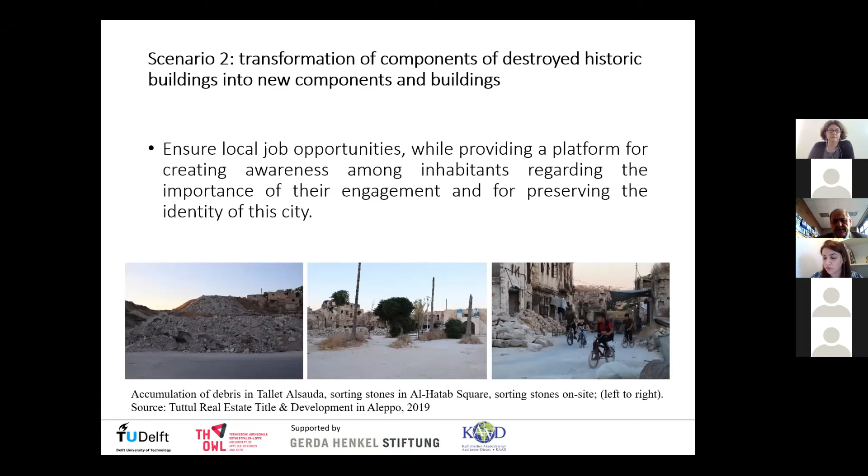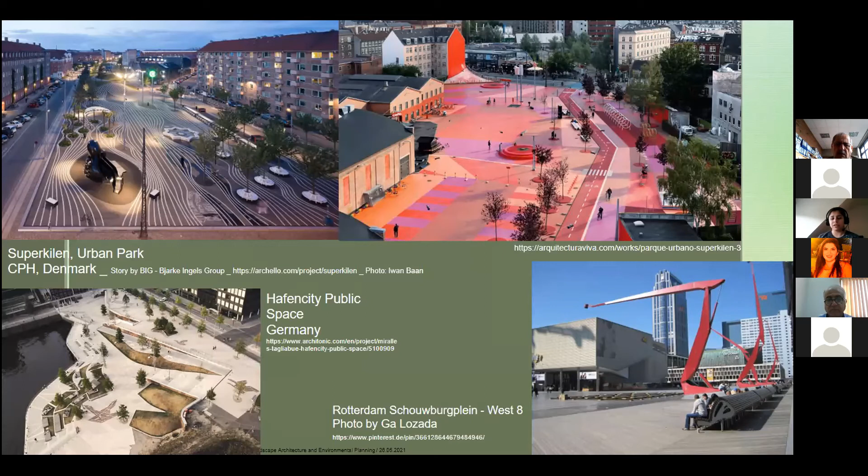The reason that I talked about sustainability was because, at first, we should know that sustainability is about three main pillars: economic, social, and environment. Landscape architecture as a field has a direct connection to environment, so we can say it has a direct direction to the pillar of environmental sustainability.

You should know that every product, also in handicraft, every product and every process of producing has a life cycle. That means we need raw materials, then it goes to processing or manufacturing, then we can operate it and use it, and after that we have end of life and recycling. If a product or process, it doesn't matter if it's landscape architecture, construction, or handicraft, completes this cycle, it could be sustainable. Because of that, we can protect our environment and have less environmental impact, which I will explain later.

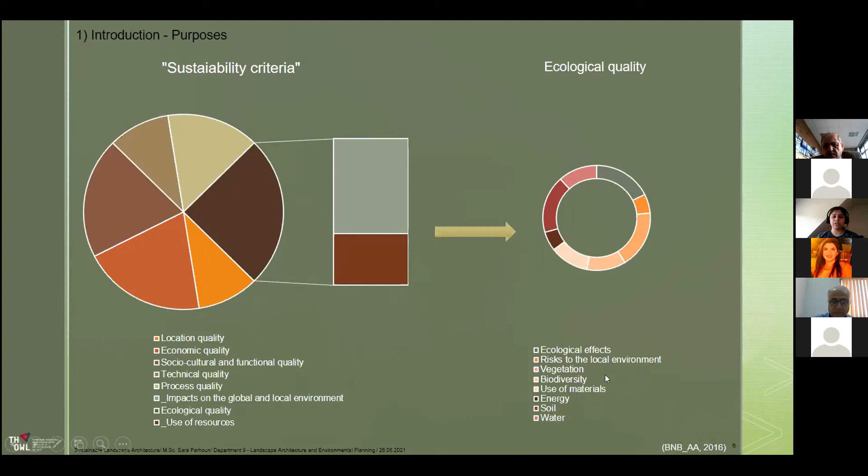I worked on CO2 neutral landscape architecture in my master's, and I will work on sustainable landscape architecture, more specifically on integration of ecological criteria for the object-related planning process of landscape architecture.

So after knowing this brief background, you can see here two figures. The figure above shows the reason I chose this subject or indicator to work on, and the shape at the bottom is for the PhD in a more general way.

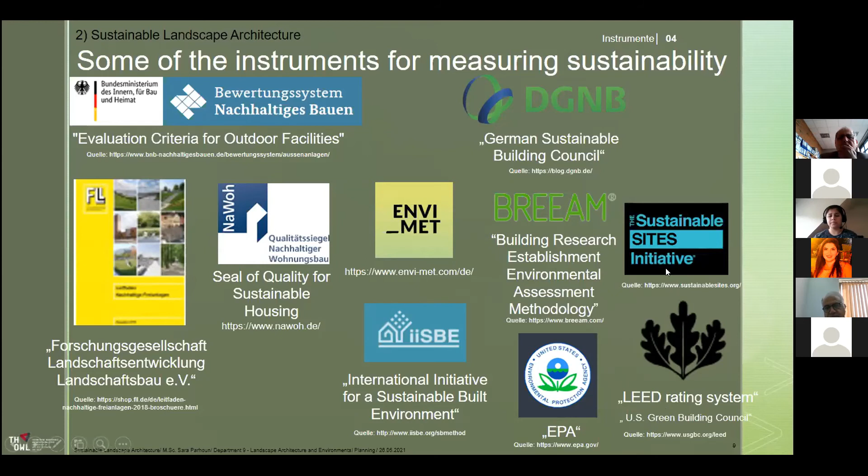Briefly, how do they work? They consider environmental indicators, environmental resources, and impacts. For example, for a process we have input like energy, water, material, and we have output. This has a kind of life cycle. When we assess this life cycle, if it's in, for example, the golden range rather than the silver range, it's more sustainable. We should also consider the effects and impacts of these indicators on other criteria like climate, water, soil, flora, and fauna, and each of them has subsections like global warming potential, CO2, acidification potential, and so on.

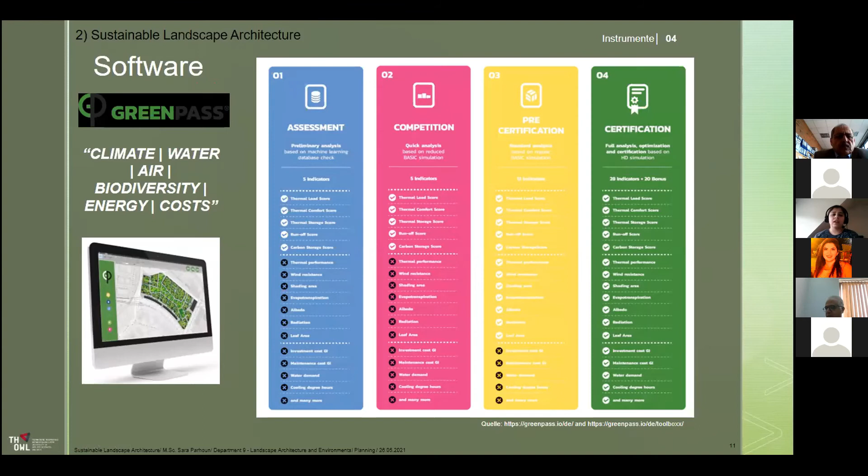There are also some softwares, for example GreenPass, I think from Austria, which measures just some indicators, not all indicators of sustainability—like climate, water, air, biodiversity, energy, and costs, in four steps. And also Green Scenario, from Ramboll. In three steps, they can give you analyzed, planned, and the best scenario for your plan to have the least impact on the environment.

Another software is Pathfinder, developed by the American Society of Landscape Architects, ASLA. You can find it on the Climate Positive Design website. It will help you calculate the CO2, or carbon dioxide, of your project. But what is the advantage if I know how much carbon dioxide I have?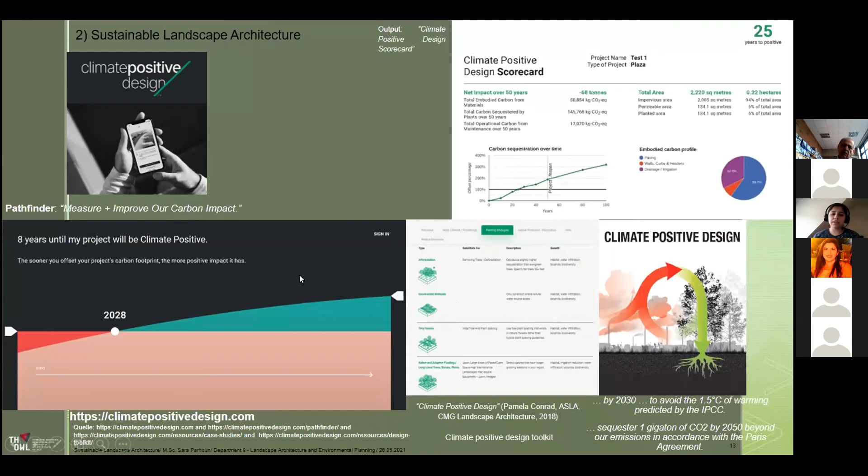There is also some guidance to have less carbon dioxide, and so on. I used this application for my master thesis, for calculating carbon. But for carbon dioxide neutrality, at first you should know that we need carbon calculation.

Why? Because as Pamela Conrad, the founder of this application, said, at first we should measure, and then we can manage. Landscape architecture is also not just a field where we can absorb carbon, but also not just to decrease carbon—also to absorb it and have something like a climate positive year, with more sequestered carbon than emitted carbon.

After calculating carbon, then it's the turn of carbon reduction, and after that, carbon offsetting. Carbon calculation and carbon calculators exist for so many industries, like individuals, small businesses, products, and also landscape architecture projects. It works for some kinds of projects like parks, gardens, plaza, and so on. For example, they said the best climate positive year for a park should be 5 years. But for a plaza, if it goes to 20 years, that's also okay.

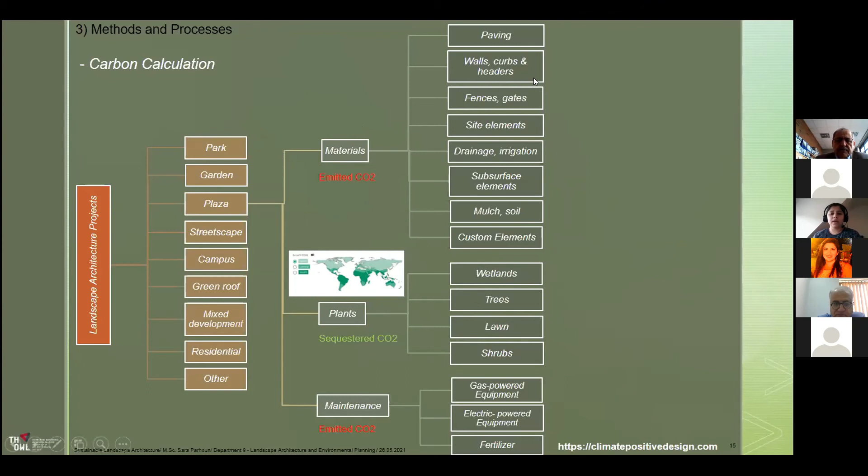The three main parameters that they consider are materials, plants, and maintenance. You can enter the exact amount of your materials, like paving, walls, and so on, and also the plants and different kinds of plants that you have, or lawns, and also the maintenance, because these plants consume energy too. So they calculate all of them, and then you have the climate positive year of your project. And if you change something in your project, you can see if it goes up or down, then you have a better situation for your project.

So for my master thesis, I developed 4 kinds of plant sites. The first variant and the fourth one are like surreal, because here we have just paved pedestrian concrete with just 5 trees. The fourth variant is also surreal but with so many plants and trees.

But the second one and the third one are more real. The 3 places were selected because here we have 3 kinds of climate zones, and we wanted to know if we have the same project with the same characteristics but in different climate zones and features, what will be the results?

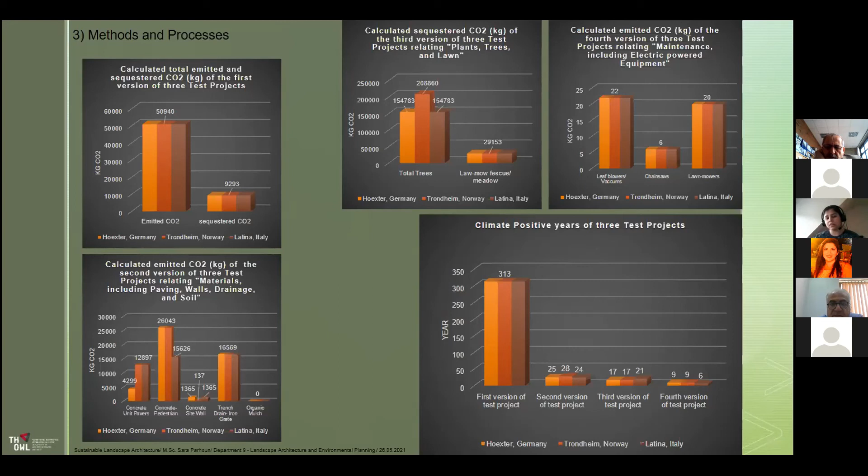After calculating the carbon of your project, it needs to be reduced, and after that you can offset it. But what does that mean? What's the meaning of carbon offsetting? That means you can buy an environmentally friendly project somewhere else and invest your money in it to make up for your emitted carbon. For example, with a solar system project, you can invest for 1 year, or some months, and then you will make up the emitted carbon of your project.

But if I want to say it short, for carbon neutrality, especially in 30 years, at first we should utilize 100% of renewable energy to reduce the demand for energy, and also utilize technologies through renewable energy to achieve negative emission and not always emit footprints.

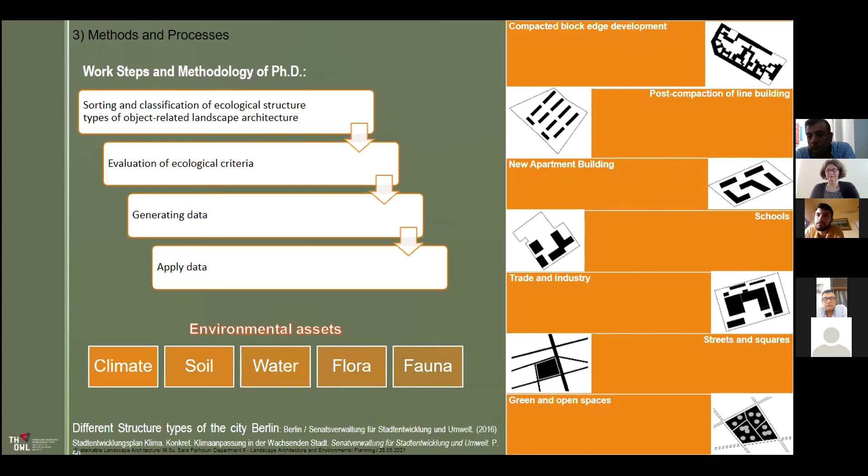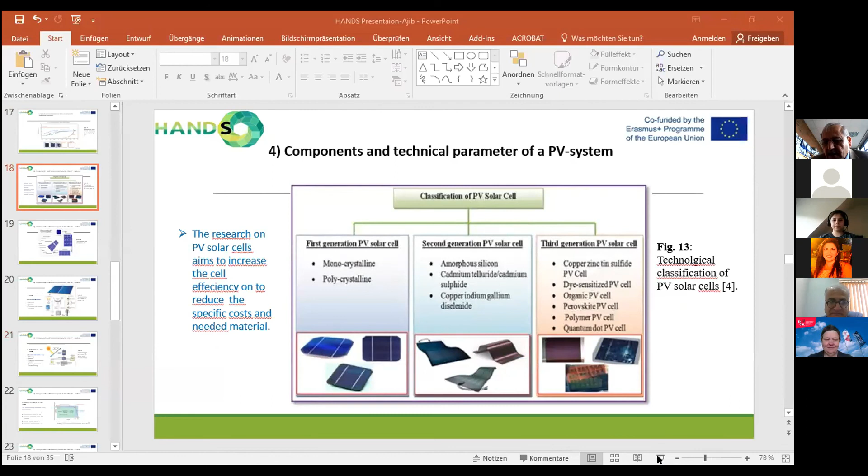So, I think we were here. Yes, so I welcome you again to my presentation about the possibilities of using solar energy in handicraft or training centers.

Here is the summary of the components. The main device is, of course, the PV array. Then we have the DC isolator, then the DC to AC - direct current to alternating current - inverter, and then again an isolator. We have here a consumer unit, that means loads. We can measure the energy which can be supplied or fed to the net, or measure the energy which we have to take from the public network - that is the main components of the on-grid PV system.

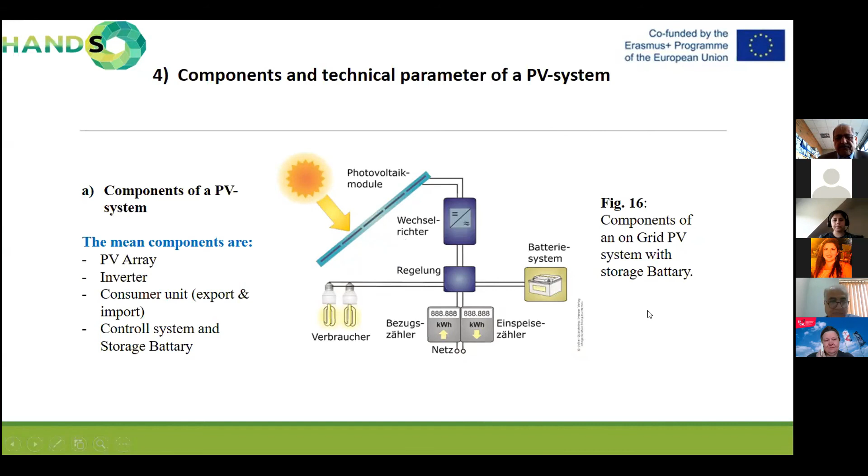So now, which technical data or technical parameters of a PV system are important and are to be considered when designing and sizing the system? Actually, the main technical data are the open circuit voltage, the short circuit current, the maximum power point power, and the fill factor of the cells.

This fill factor is defined in the equation as the voltage at the maximum power point, multiplied with the current at the maximum power point, over the product of the short circuit current of the cell multiplied with the open circuit voltage of the circuit. Of course, the higher this fill factor is, the better the cell or the system works.

There are many factors which influence the possible maximum power we can take from the solar cell, the solar module, or the system. The main influence factor, besides solar radiation, is actually the temperature, the working temperature of the module.

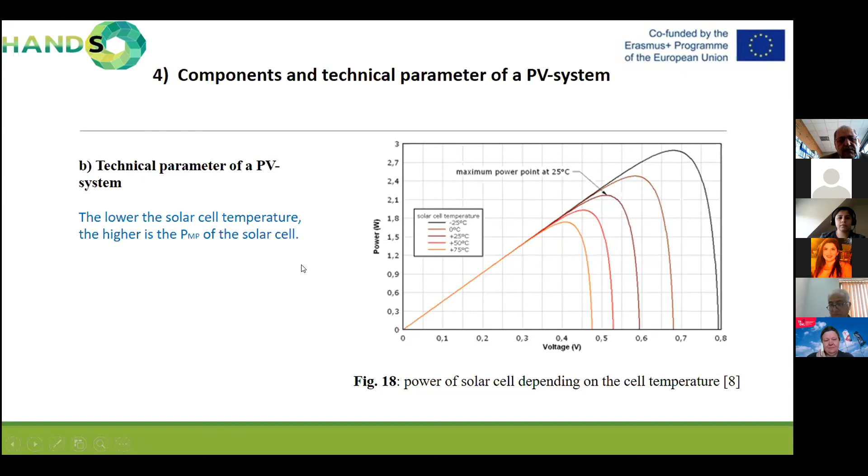So now, how can we design a photovoltaic system? There are two possibilities: either we can design the system as a standalone system or as a grid-connected system. Because a grid-connected system is very general, I will make an example for the possibility of a standalone system.

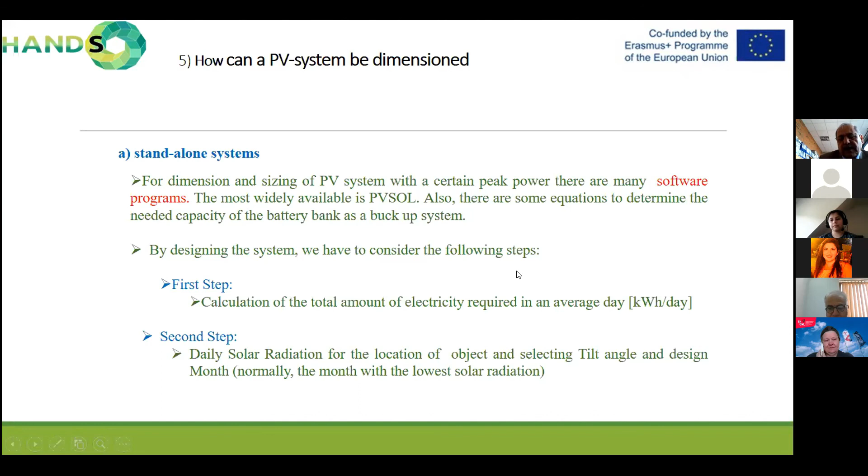Therefore, we take the solar radiation in the lowest amount in the year, that means in the month with the lowest radiation. As an example, here in Germany, at least, the lowest solar radiation is in December. I think also in Syria and Jordan it's the same, since December is colder and has the lowest solar radiation.

So now we can calculate the related peak power of the PV arrays using this equation: 1 plus a security factor or reserve factor, mostly 50%, multiplied with the needed energy for the load for the month with the lowest solar radiation in the year, in the region.

This is divided over the performance ratio of the solar system. The performance ratio is a factor which considers many influence and loss factors, as an example the dirt on the surface of the PV system, and the losses in connecting the system with the inverter.

This performance ratio is about in the range of 60 to 80%. The lowest value is in regions where there's a lot of dirt that comes onto the surface of the photovoltaic modules, reducing their performance. The highest factor, around 80%, is in regions with many rainy days in the year, because the rain can clean the outer surface of the modules, so the performance ratio can be higher there.

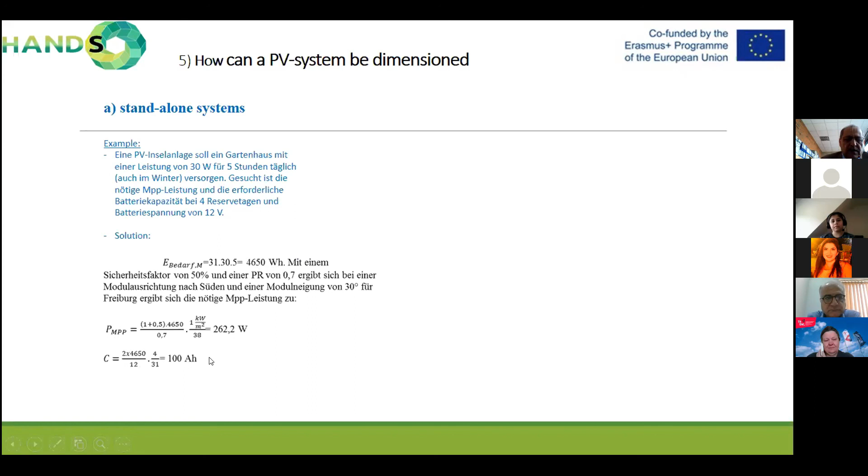The peak power needed is about 262 watts, and then we can calculate the needed battery capacity — here we have 100 ampere hours. Of course we can also calculate the system when it is grid-connected.

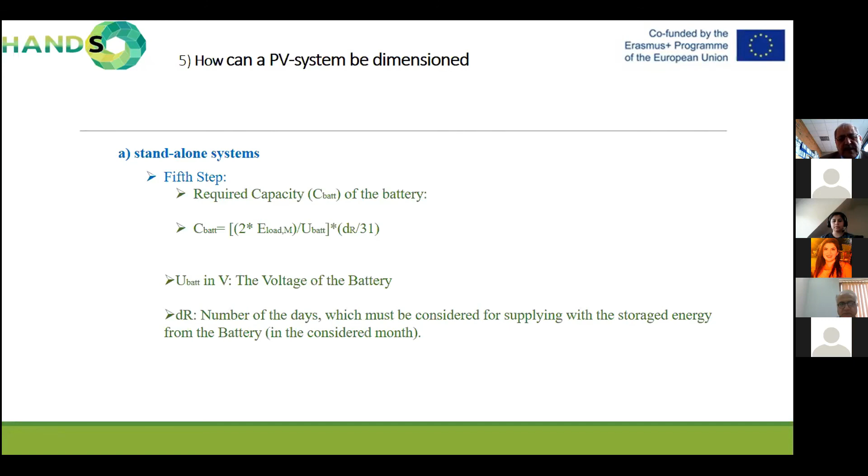This data is very important for choosing the suitable inverter for the design of the PV system. As you see, these two parts, either a standalone system or a connected system, can be installed in small projects, small workplaces of handicrafts, or training centers, also on the ceilings of universities or other buildings, governmental buildings, or other buildings where we can use solar energy to reduce CO2.

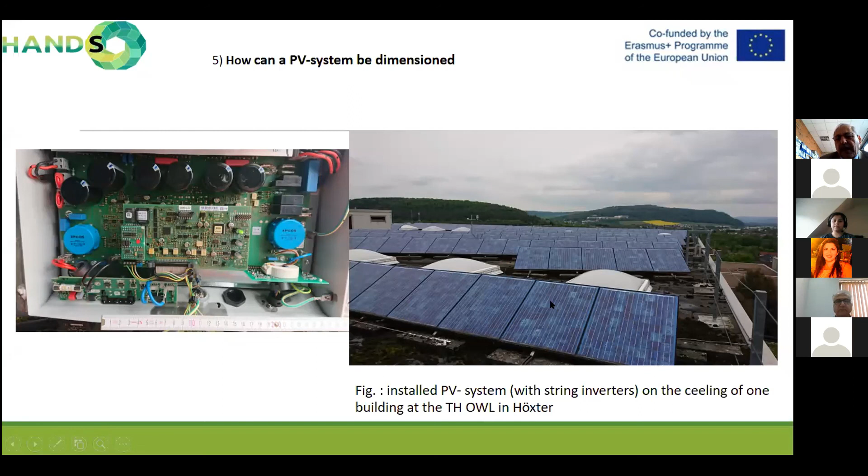That is our photovoltaic system at the ceiling of one building of our university in Höxter, and that is the inverter, a string inverter. As you see, the capacity of this system is about 30 kilowatt. It will be replaced with a more efficient photovoltaic plant, but it has been installed for more than 20 years. The capacity is supplied to the basic load of this location in Höxter.

So, again, that is the picture where you see the inverter. In every string there is an inverter to invert the energy from direct current to alternating current. And these are some references I used, and that is big solar plants which can be used to supply access to the grid directly. Many thanks for your attention, and if you have a question, you are welcome.